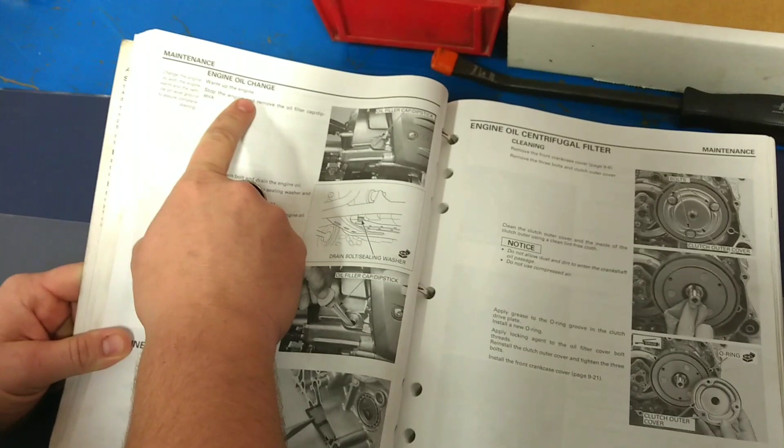First off, you start by warming up the engine. We previously warmed up the engine, so it's not going to be in the video.

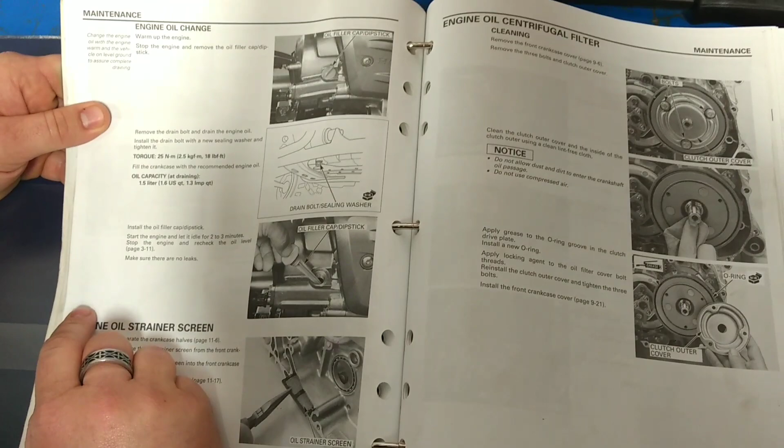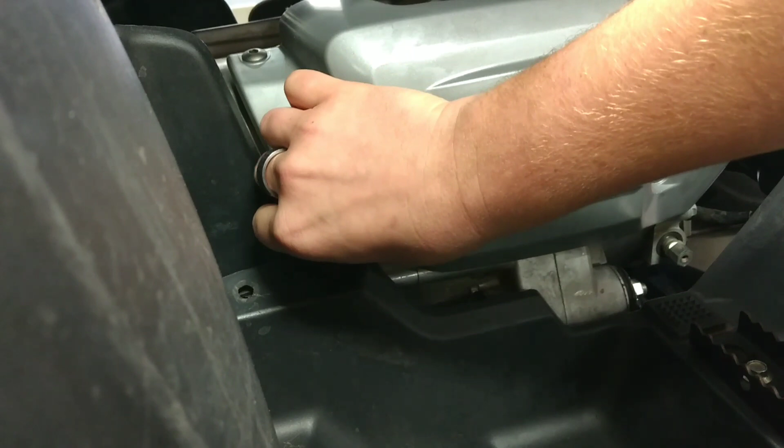After that, you stop the engine and remove the oil filter cap or dipstick. The oil filter cap or dipstick will be located on the left side of the Recon. And you remove it like so.

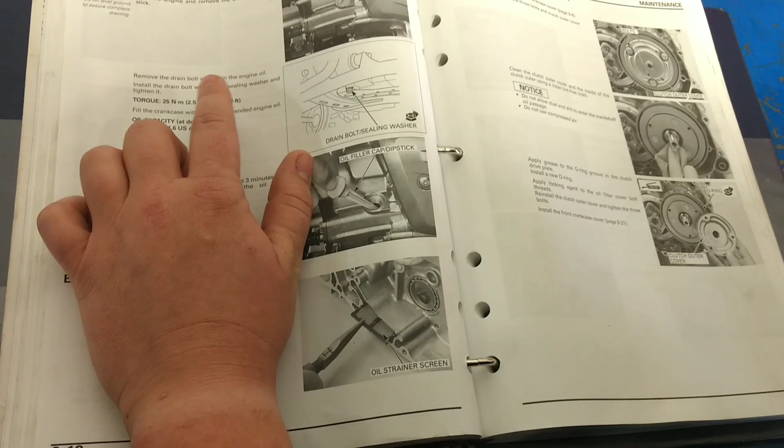After removing the dipstick, remove the drain plug bolt and drain plug from the engine, and drain the engine oil. The drain plug bolt will be located under the vehicle. I'm going to be using a 17mm socket to get it off.

Hang on, I turned it the wrong way. I did.

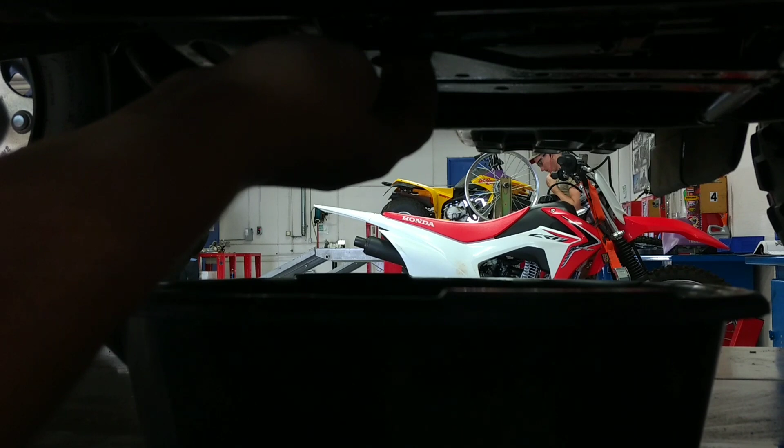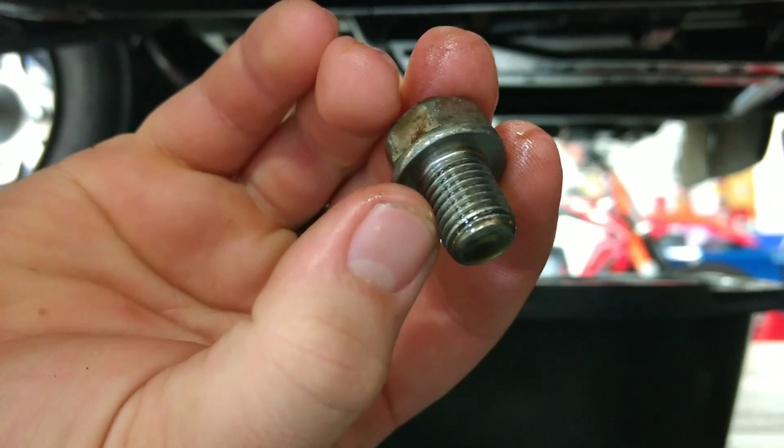After taking the drain plug off, be sure to remove and replace the washer after every use.

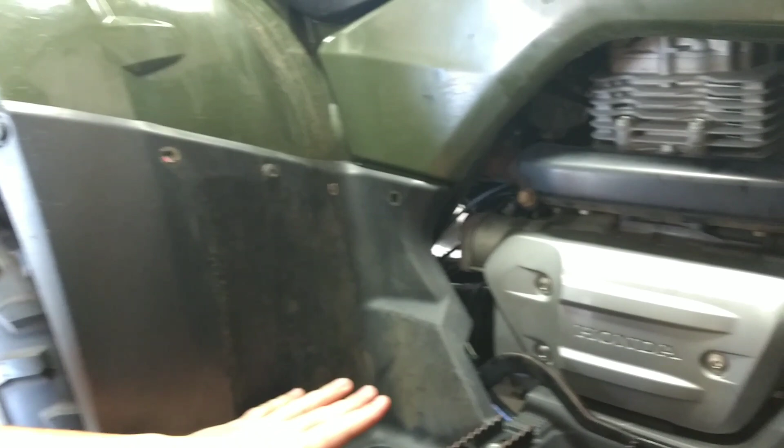After removing the drain plug bolt, you want to take all these plastic pieces off right here to be able to get to the front crankcase on the engine. To remove the plastic on the four-wheeler, you need to use a flat screwdriver or a smaller pry bar.

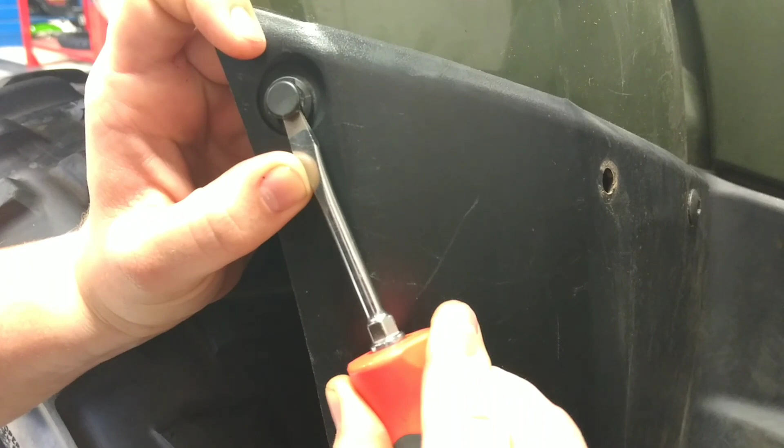You use it to get these off. You pry this up, pull on this, push from the back, and it should come out, like so.

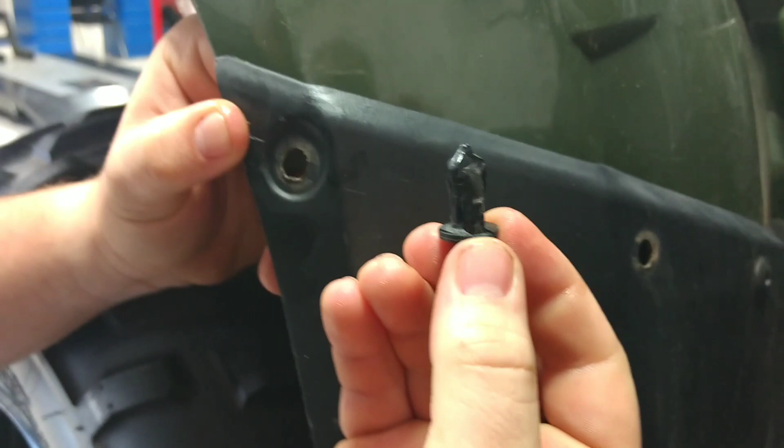After removing the plastic clips on the plastic on the four-wheeler, you want to come down here and make sure that you pull these 10mm bolts out right here. That way you can remove this plastic.

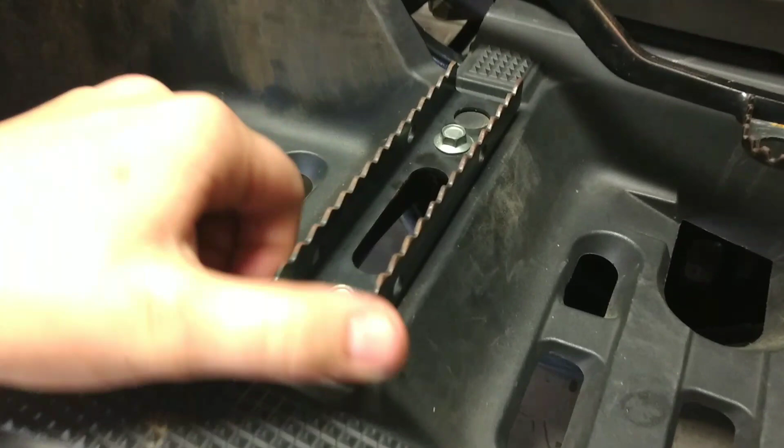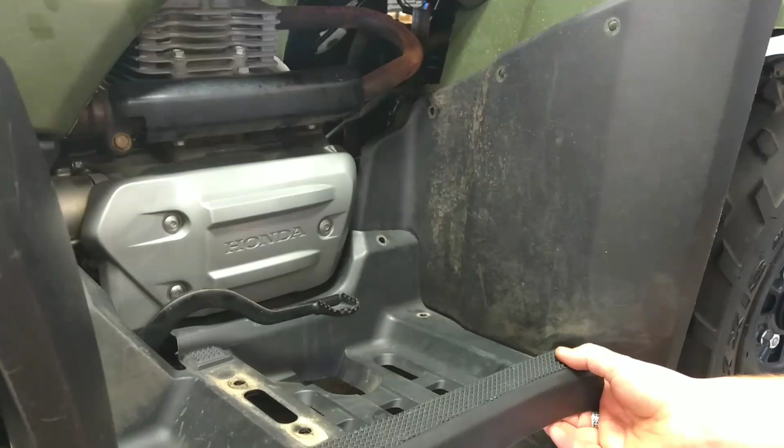After you remove the foot peg, pull this plastic piece out. And then after that one, pull this one out as a second piece.

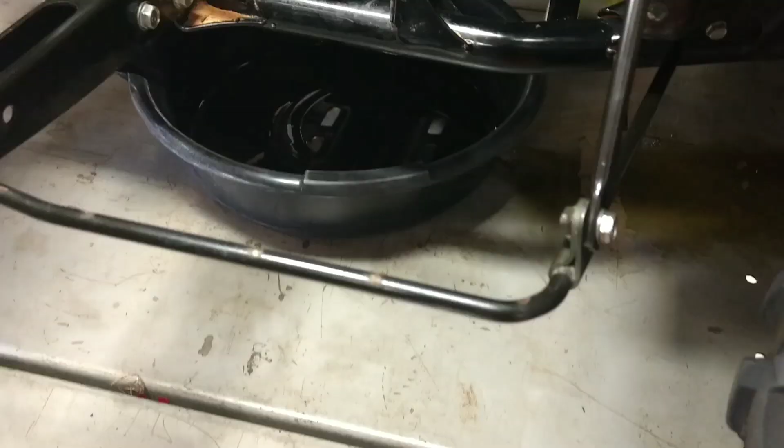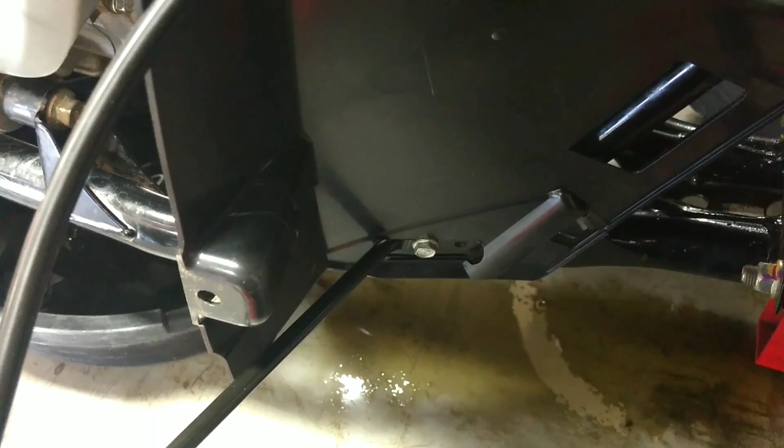After you move the plastic pieces, there's these bolts here connecting these wires. You'll need to remove those bolts in order to get to the front of the crankcase.

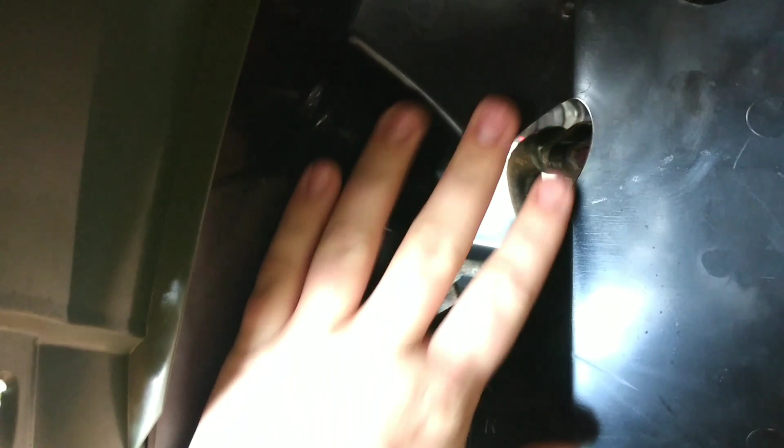After you take off the wire pieces, you'll come to this plastic piece right here. It's held on by one Phillips or 10mm bolt, and it's clipped on the other side, right here.

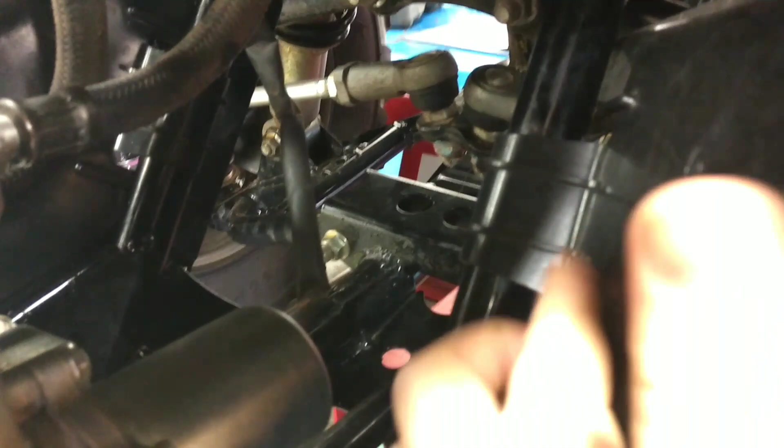Once you get all this outer covering taken off, you are now able to access the front crankcase cover.

After you get the vehicle up on its end, which is the easiest way to do it, because inside the crankcase it has a lot of sensitive parts that will fall out if you have it down on the ground. So this is just an easier way of doing it.

You want to start off by taking these oil cooler hoses off, like I will demonstrate now. Each of them have a 10mm bolt. After you've taken the bolts out, you just want to pull the hoses out.

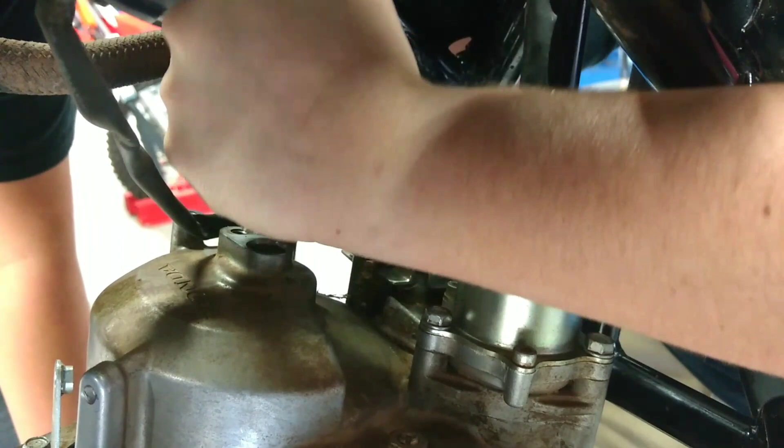Be sure that whenever you pull the hoses out, that you plug both of these holes where the hoses go into the crankcase.

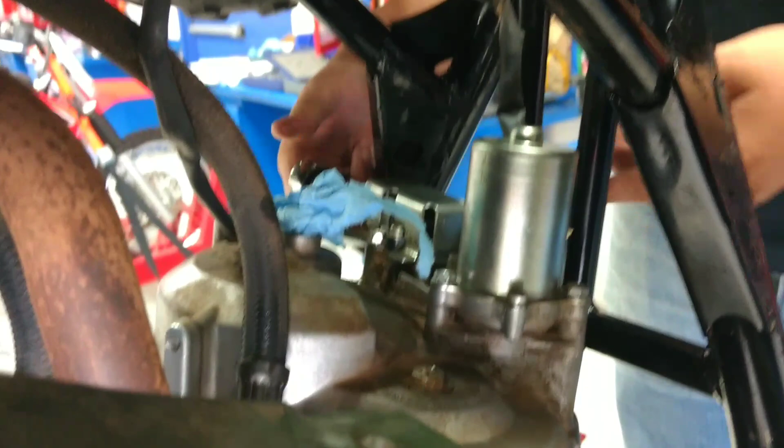Now we're going to take off this angle sensor, and there's two bolts. They are both 10mm, and you're going to unscrew these as I'm fixing to demonstrate.

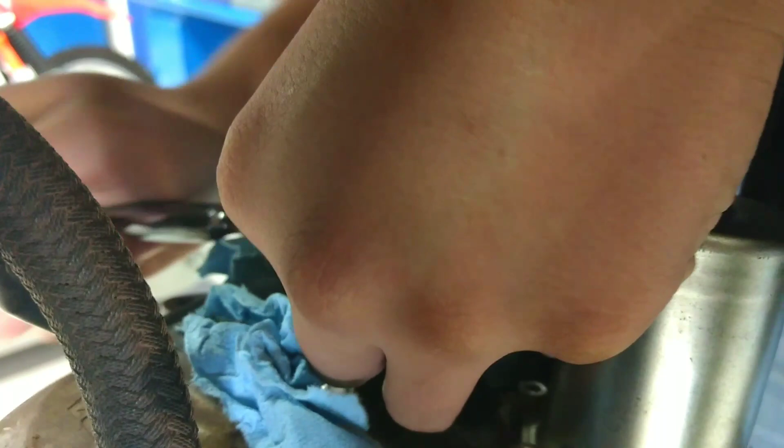After you do that, you want to get the case bolts off. These are 10 millimeter.

Also pay attention to where these plates go, because these plates connect most of the plastics and things that were on the outside.

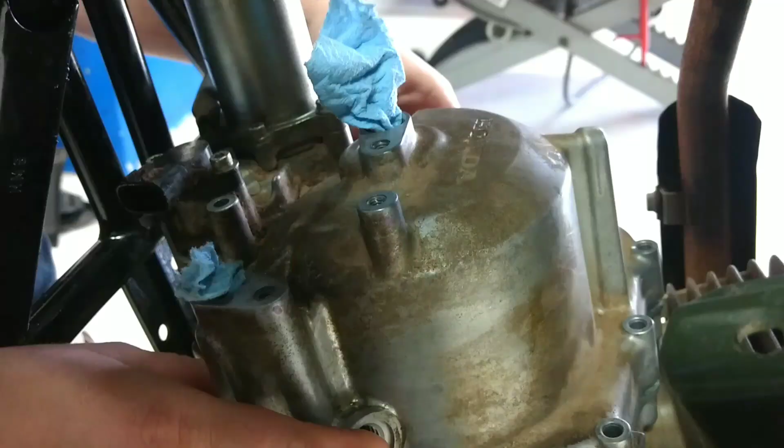After you remove those bolts, you can then pull the case off. Case cover, excuse me. Like so.

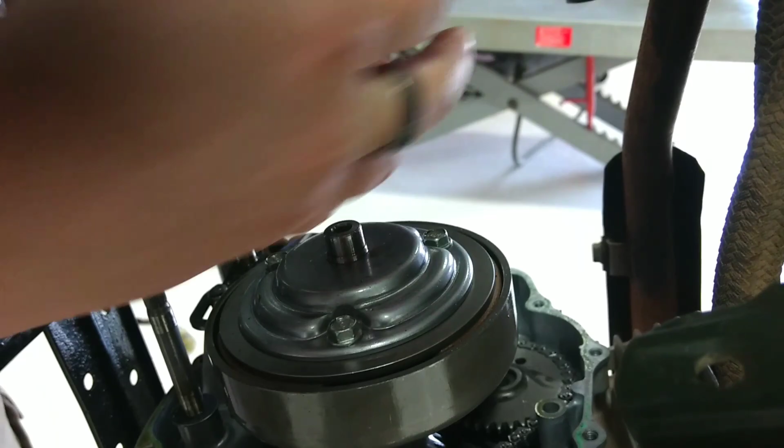This here is a centrifugal oil filter. By removing this plate, you want to take these 3 10 millimeter bolts out.

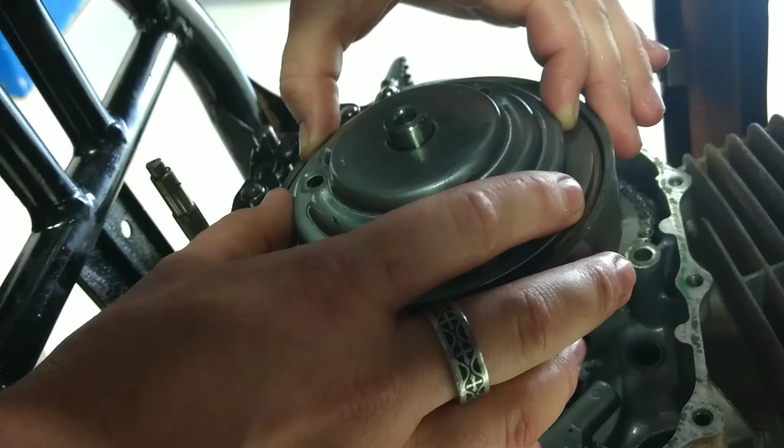This piece here is the oil filter. As you can see, all the sludge and grime is on the outside of the oil filter. Hence the centrifugal force, which the oil comes in through here, and this spins it and throws all the heavier sludge and stuff on the outside.

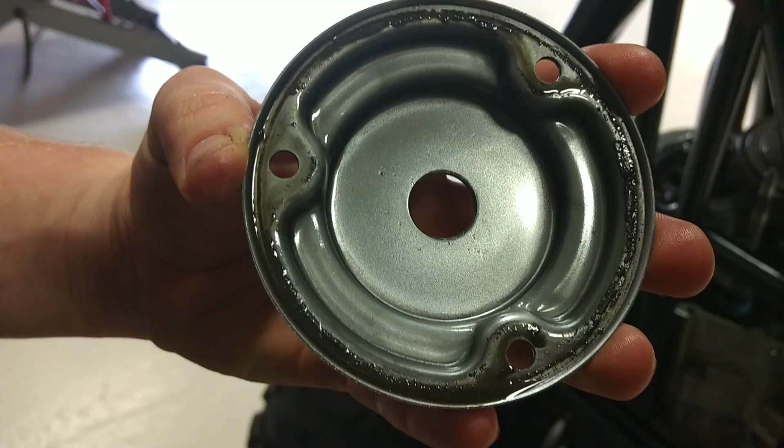Just to clean the oil filter, you want to take a rag and just wipe all that off and get it nice and clean.

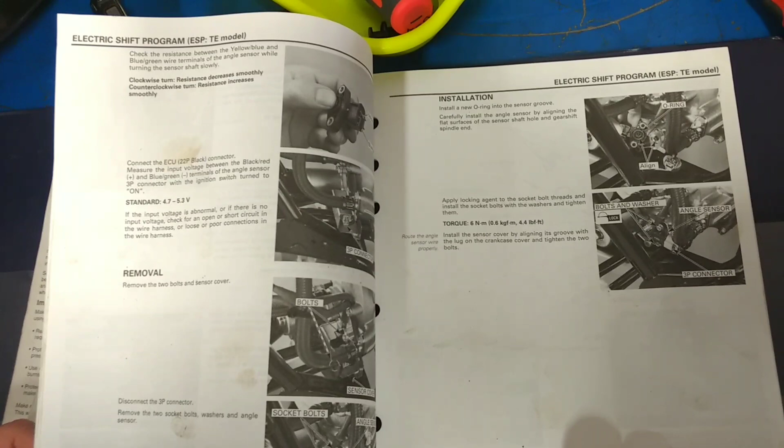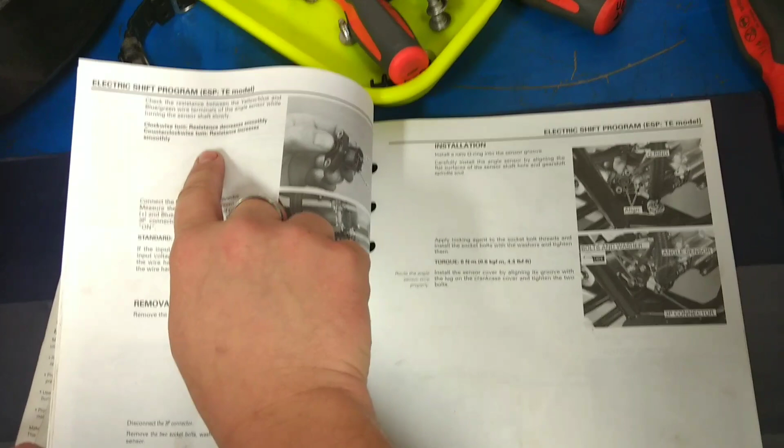Whenever you place the crankcase cover back onto the motor, you want to be sure that the angle sensor has no resistance, or resistance decreases smoothly turning clockwise, and counterclockwise resistance increases smoothly.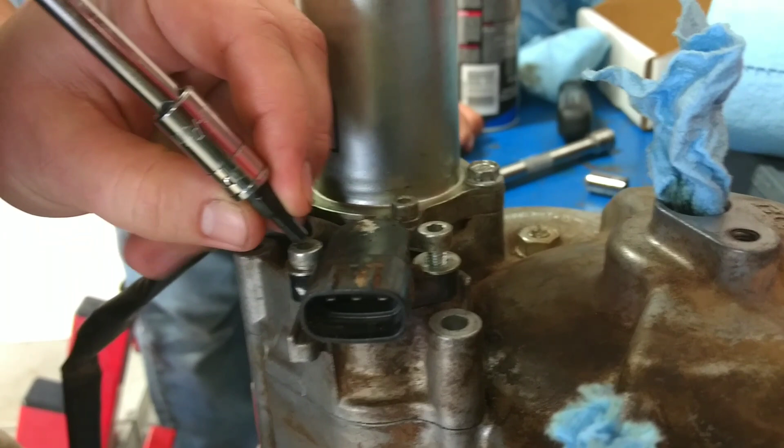Removing the Allen bolts from the angle sensor. These are a 4 millimeter Allen head.

There's this rod right here. Make sure that this rod lines up with the angle sensor once you replace it onto the motor.

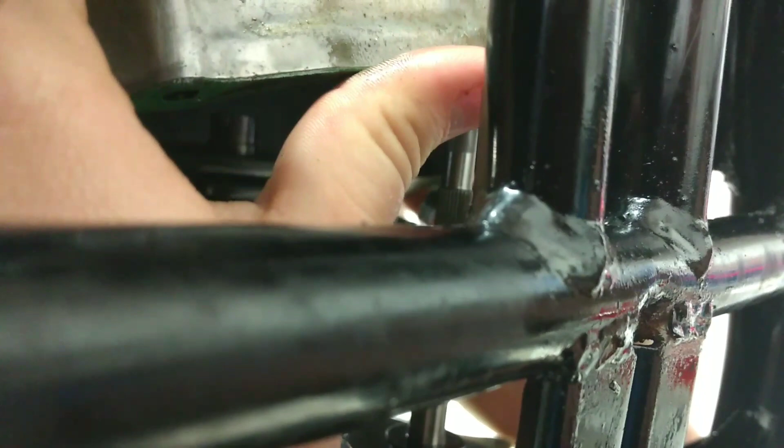After you replace the cover, you want to make sure that you put the bolts back in.

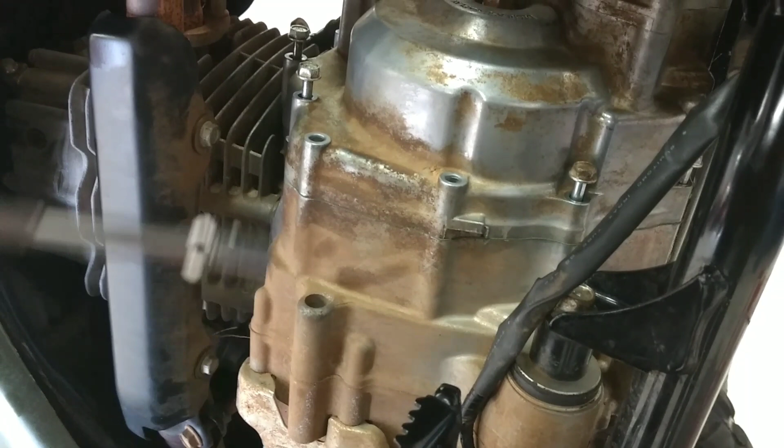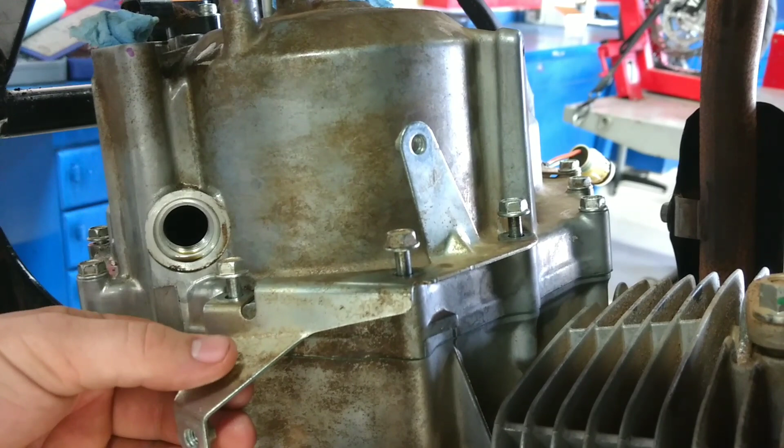Also, be sure to reinstall these plates because they help hold on the outside plastic and covers. After doing that, you also want to be sure that you reconnect the electric wires.

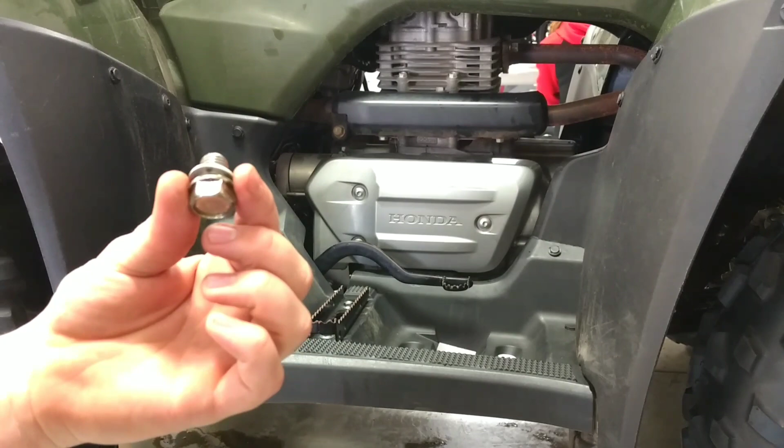After reassembling all the plastic pieces, you want to be sure that you replace the drain plug with a brand new washer before you put the oil back in.

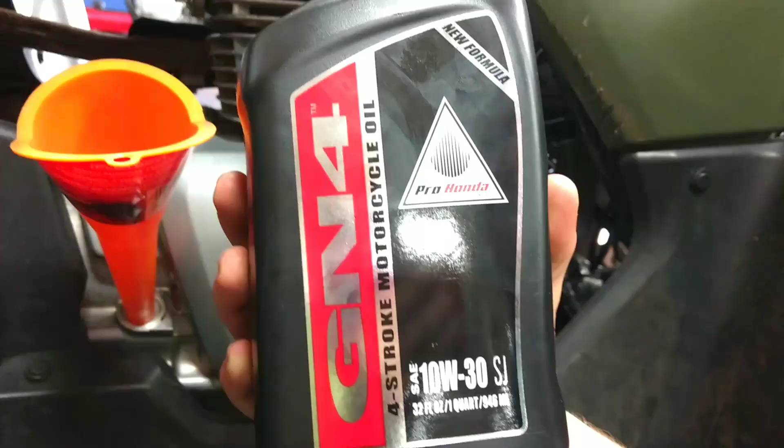The oil that I'm going to be replacing it with is going to be 10W30 4-stroke motorcycle oil.

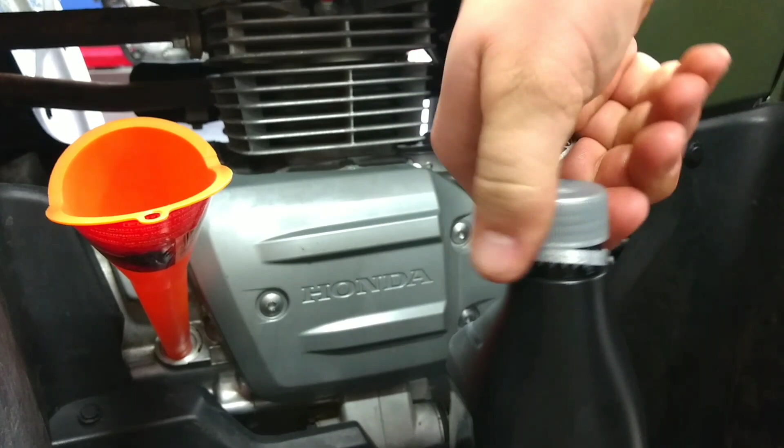After you put the oil in, you want to start the four-wheeler and make sure that you get it to operating temperature. After that, check the oil again.

Now that we got that checked and our vehicle is running perfectly, that's how you change the oil on a Honda Recon.